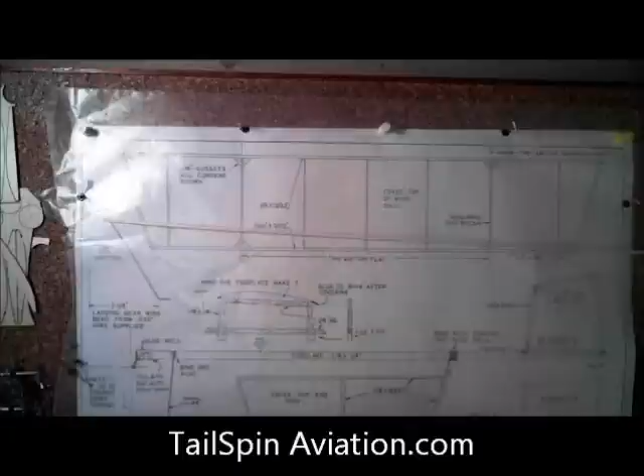With the tail constructed, we can now move on to the wing. The first step is to cut out the wing ribs. I know it's tempting to try to just punch them out, but if you do, you risk damaging a part. It's better to play it safe and cut the parts loose, then give the parts a quick sanding.

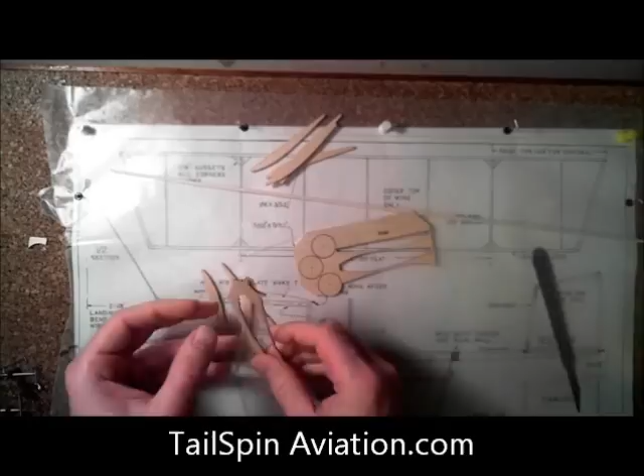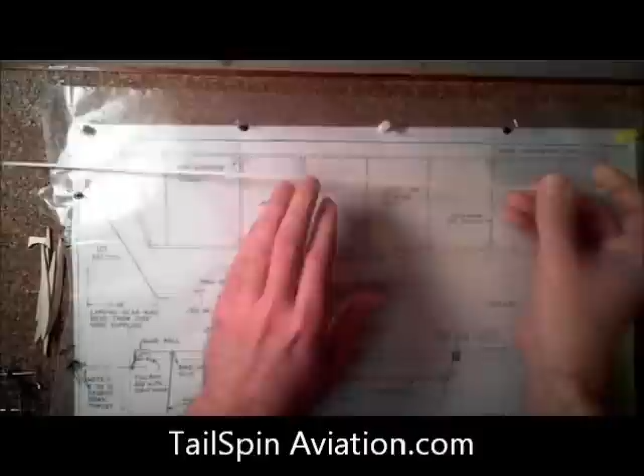Next, find the 1/16 by 3/32 inch stock, which will become the trailing edge of the wing. I know it's hard to tell in the video, but this piece has been sanded to a triangular shape, so it will fit the slope of the wing once assembled. This makes things easier down the road.

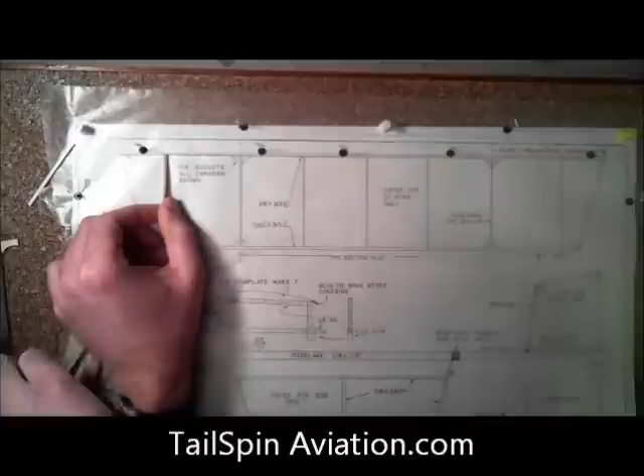Now that the trailing edge is in place, we can begin gluing the wing ribs in place. The thinner end of the wing rib goes towards the back. You will notice on the plans there are two places marked with an X where the dihedral break will be. Do not install the wing ribs in those locations yet. We want to assemble the rest of the wing flat, and will install those wing ribs after we have angled the wing tips. You may have noticed I almost made the mistake of installing one of those wing ribs.

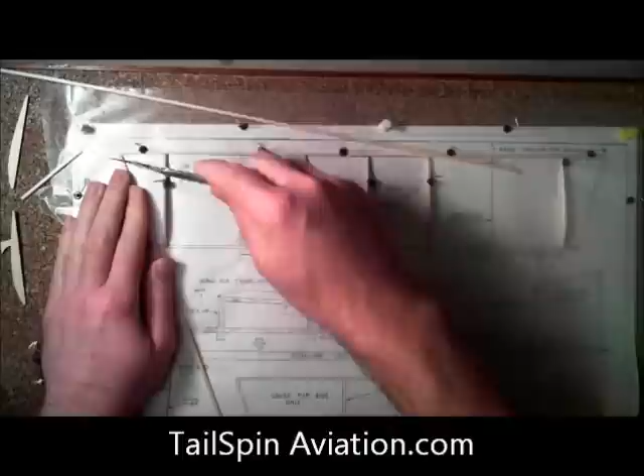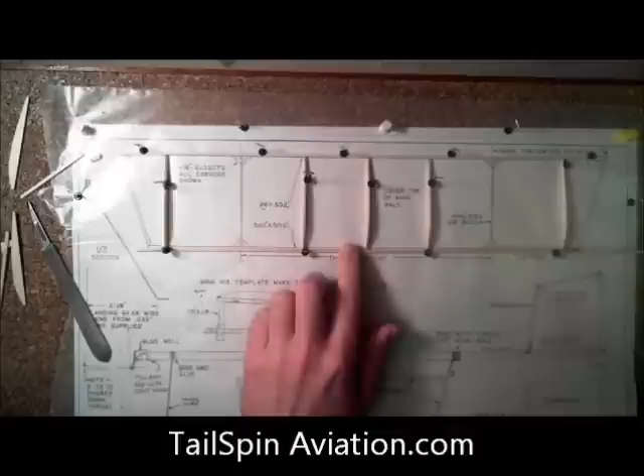Locate the 3/32 by 3/32 inch stock. This will become the leading edge of the wing. Glue and pin this part into place. Now cut and glue the wing tips into place.

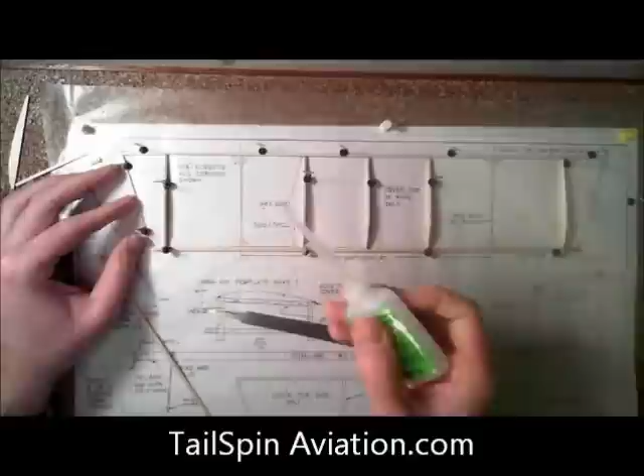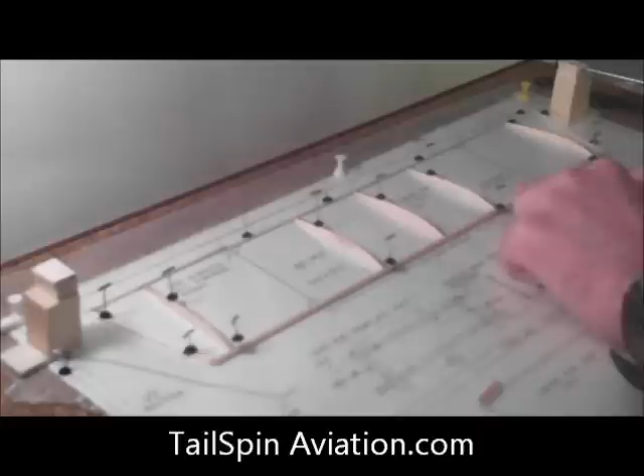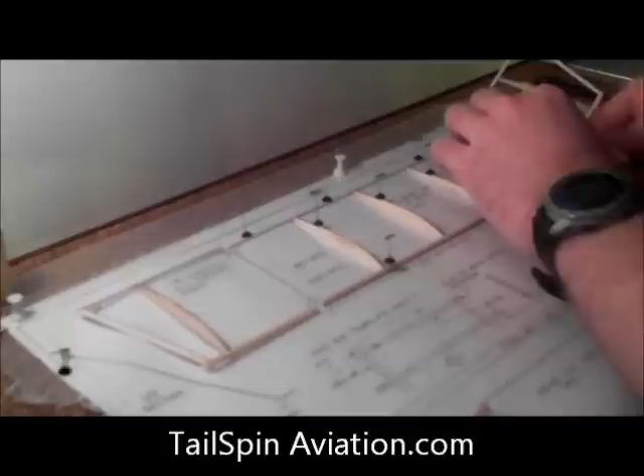It's now time to make the dihedral cut. Cut the leading edge and trailing edge of the wing where shown on the plans and remove the wing tips from the board. The end of the wing tips need to be sanded at an angle before being glued in place in order to make for a good fit. With the center section of the wing still pinned in place, prop up the end of each wing tip 1 3/4 inches and glue it in place.

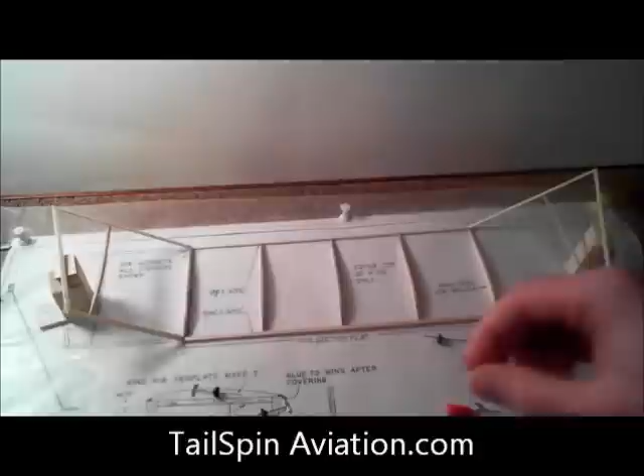After the glue has dried, add the missing wing ribs. It's not shown in this video, but gussets must be added to the dihedral joint locations for extra strength. Your wing is almost finished now. All that is left is to sand the leading edge to a rounded shape that follows the curve of the wing rib.

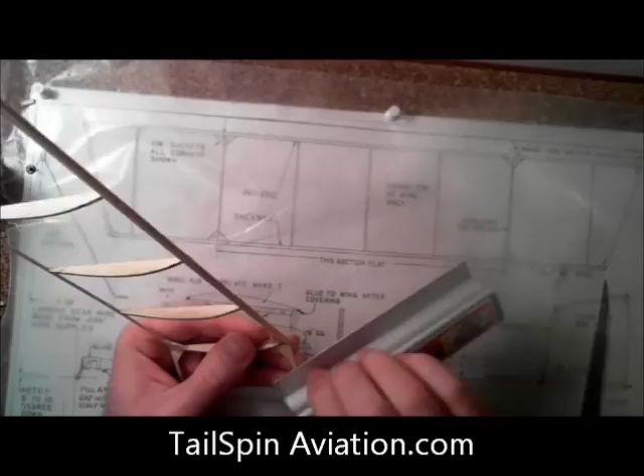Now that the wing is finished, we can move on to the fuselage. Glue a scrap piece of balsa onto the nose of the fuselage so the propeller hanger will fit snugly. Then trim and sand the back of the fuselage to fit the shape on the plans.

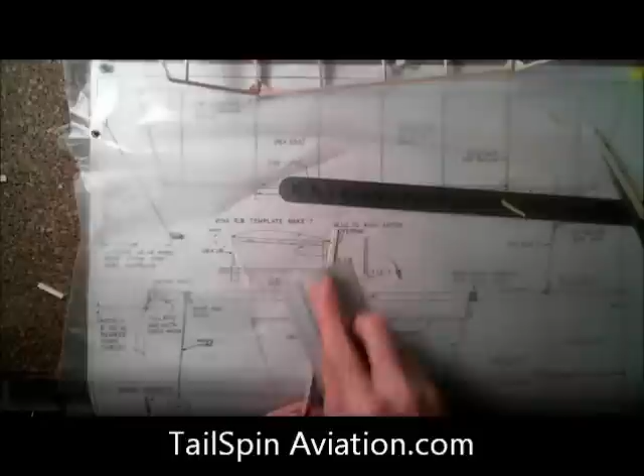Now is a good time to add the rear rubber hook. The hook comes pre-bent with the kit and is ready to install. Glue the hook where indicated on the plans and then bind with sewing thread. Apply another thin coat of glue over the thread. This creates a very strong bond. Glue the wheel halves together with alternating grain direction. This will make a stronger wheel.

Now we can move on to the landing gear. The gear is not preformed and must be bent to shape. A permanent marker comes in handy for marking bend locations. Use the full-size outline on the plan as a template. When making a bend, remember that the curvature of each bend will take up a certain amount of material. It takes a little practice to get this down to an art.

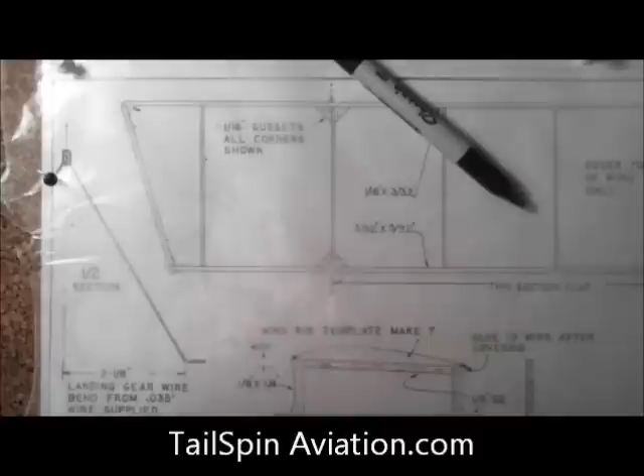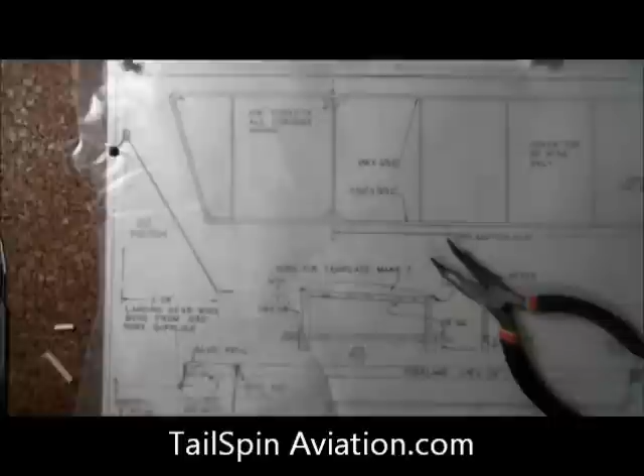Be very careful when cutting off excess wire. The landing gear is formed from spring steel, and smaller wire cutters may not be able to do the job. I like to use aircraft cable cutters for the job. Refer to the plans for proper location of the landing gear. The landing gear is attached the same way the rear rubber hook was. First glue in place, then reinforce with thread, and finally a thin coat of more glue.

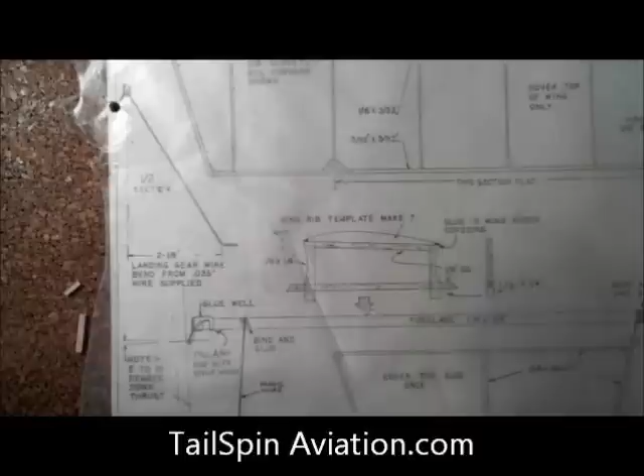With the landing gear finished, you can now install the wheels. If you have any extra pin clamps laying around, they work very well as wheel collars. Just press them on and glue in place.